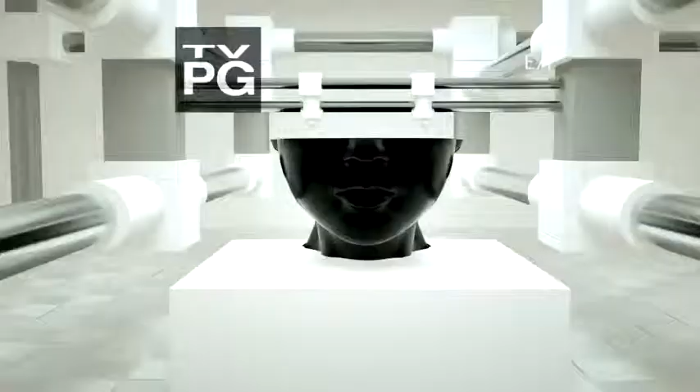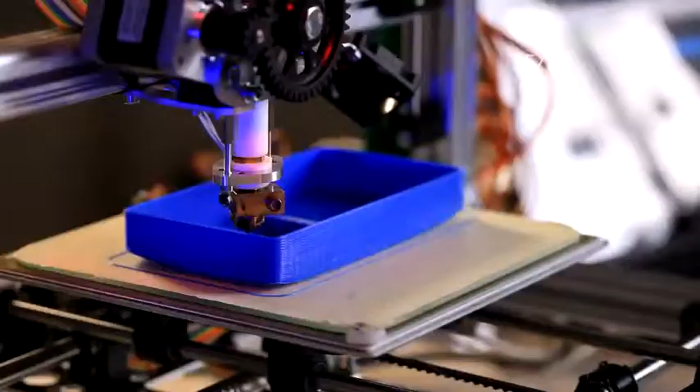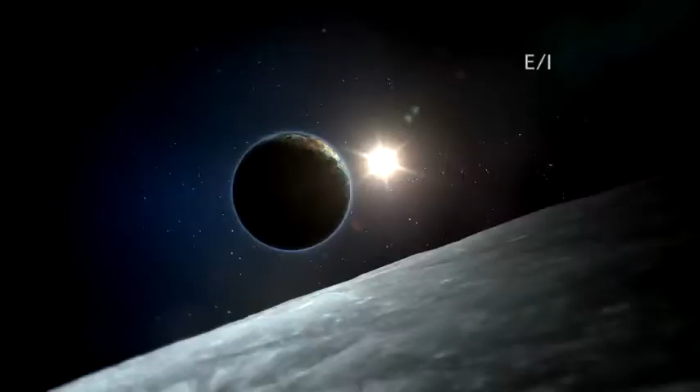Three-dimensional printing. How we make things will never be the same. It's really a tool that allows you to build anything that you want. Manufacturing worldwide is getting a makeover. People are already working on printing human organs. 3D printing is changing everything from healthcare to education. When the 3D printer arrived, I was truly like a child on Christmas Day. It's in the home, it's in kitchens, it's even in space. 3D printing, how it will change your life, in this week's edition of Earth 2050.

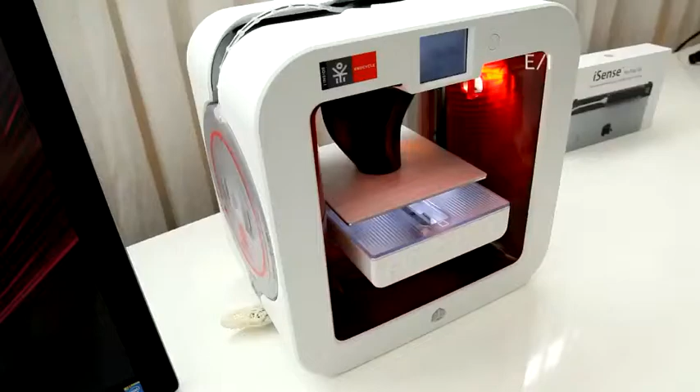Even though this technology has been around for a long time, it's really only starting to take hold today. Manufacturing doesn't just happen in a factory, it now happens in your home or in your school.

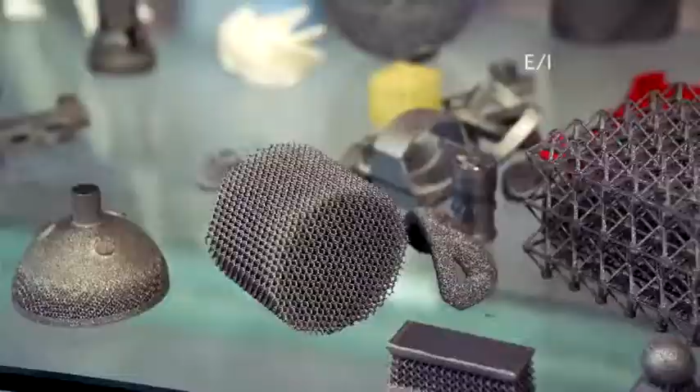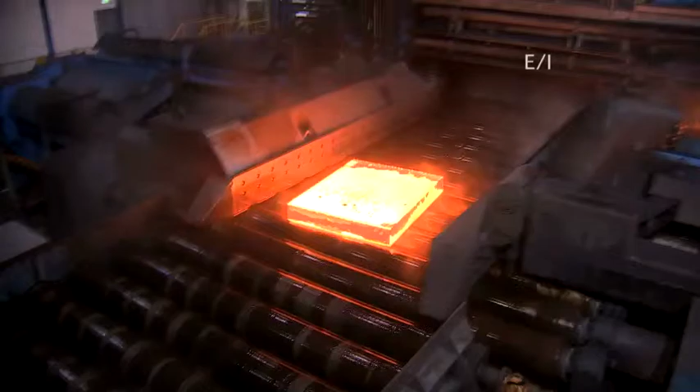So what exactly is 3D printing? It's literally creating something from nothing, which is not the way products have traditionally been made. That old way is called subtractive manufacturing. Subtractive manufacturing has been around for thousands and thousands of years, ever since the first person took a stick and a knife and carved it into a spear. That was subtractive manufacturing. 3D printing reverses this process.

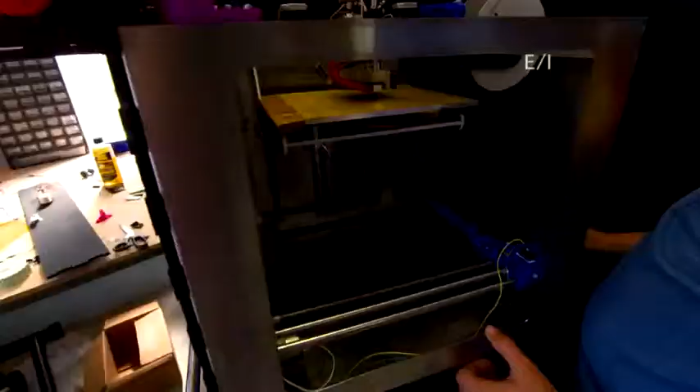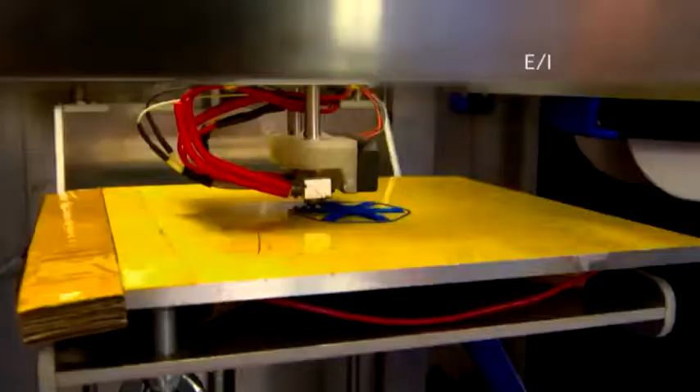You start with an idea, you create it digitally on a computer, then actually use a printer to build a solid three-dimensional object from that design. It's the opposite of subtractive manufacturing.

So what is 3D printing? It falls under this field of additive manufacturing, the concept of building something up layer by layer, adding the layers together essentially. With a 3D printer, we're laying down material one layer at a time until we build that three-dimensional object.

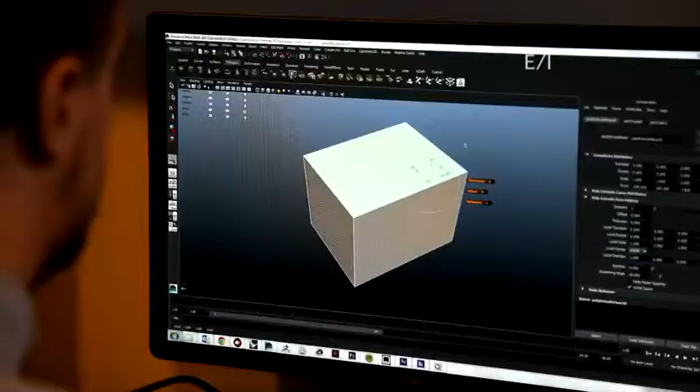So why is this concept so revolutionary? Because there are virtually no limits. If you can create an object on your computer, the 3D printer can build it. It's very easy to do. That is, we say complexity is free. The printer doesn't know the difference between whether it's a simple part or a complex part. It just comes out. Complexity doesn't cost you anything.

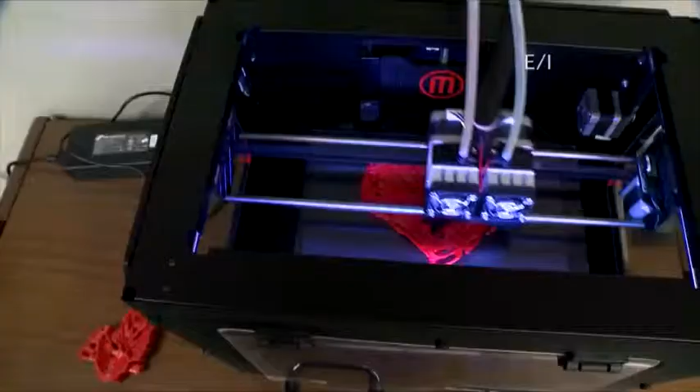The machine really doesn't know whether I'm building just a block with a hole in it or an extremely complex heart or even a DNA sequence. The machine doesn't care. And since you're starting with an idea on a computer and building it up from scratch, 3D printing is not only faster, it's cheaper. It's really what we call digital manufacturing, the idea that you can go from digital to physical.

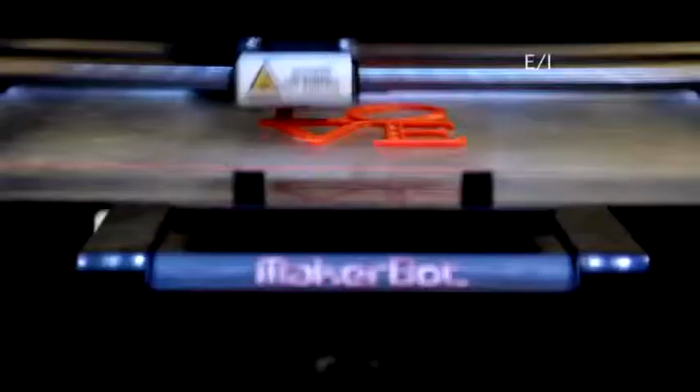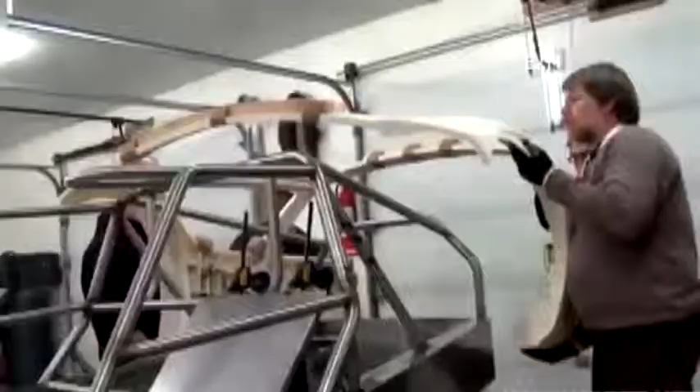3D printers can do everything from building small objects like toys to heavy manufacturing. So we're starting to see people learn how to print parts of spaceships, of airplanes. Designers of this aerodynamic, energy-saving car called the Urbee made most of it with a 3D printer. All sorts of materials, from metal to plastic to sugar, can be used to create products.

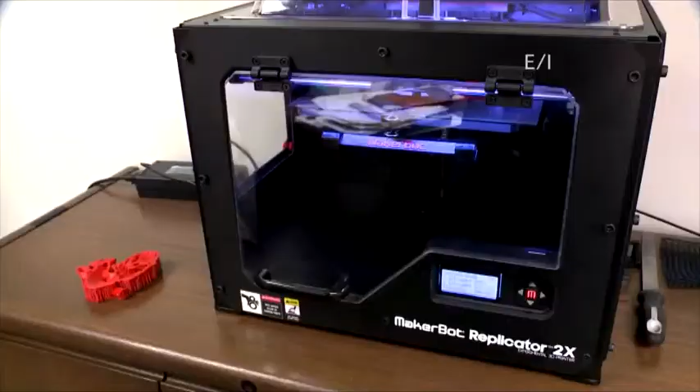3D printing is revolutionizing healthcare. People are already working on printing human organs. In fact, there's some very successful work that's already been done. This is a very important tool. It's made it possible for us to do a lot of things. 3D printers have actually saved lives.

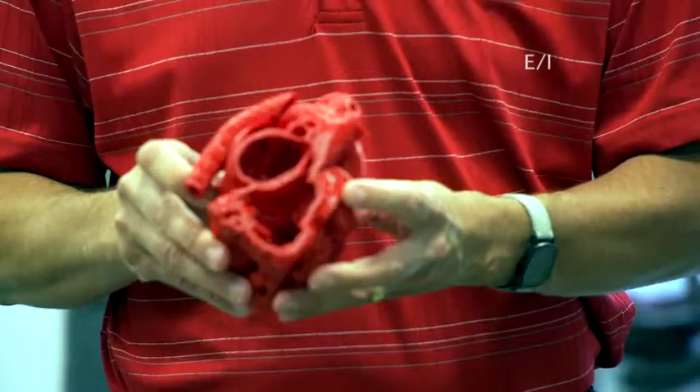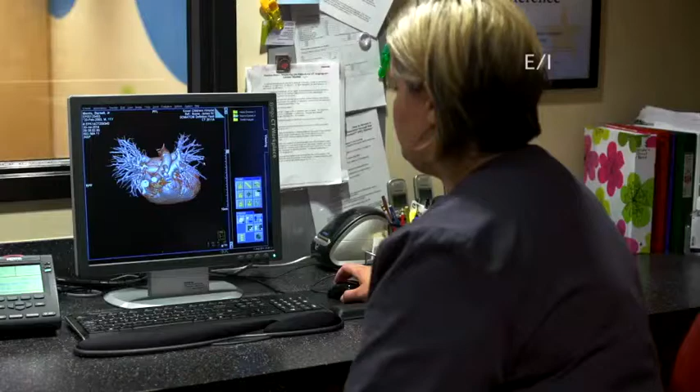Surgeons having to operate on newborns with congenital heart defects, which is an incredibly difficult operation, have turned to 3D printers. This is a scale model of an infant's heart that was built as a pre-surgery planning model. They were trying to figure out what's the best way to do this surgery without impacting the child in a harmful way. The child's X-rays and CT scans were enough to create a computer model of his heart, which was then built with a 3D printer.

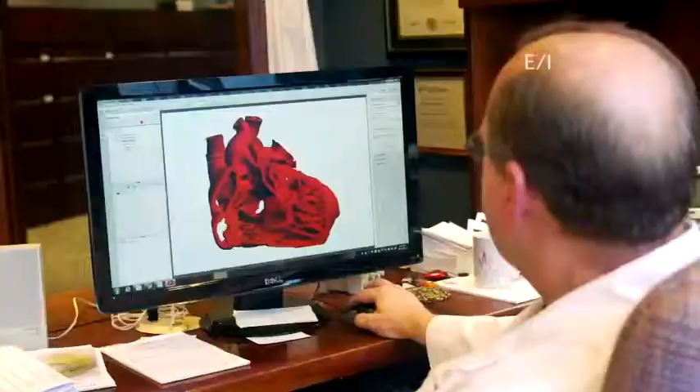They call me up and say, listen, I've got a model of this heart. You want to see it? Thanks to the 3D model, surgeons knew exactly what they were dealing with before they went into the operating room. It should benefit the patient because it benefits the surgeon. If you plan in advance, you can minimize the time it takes to work inside the heart and do the repair.

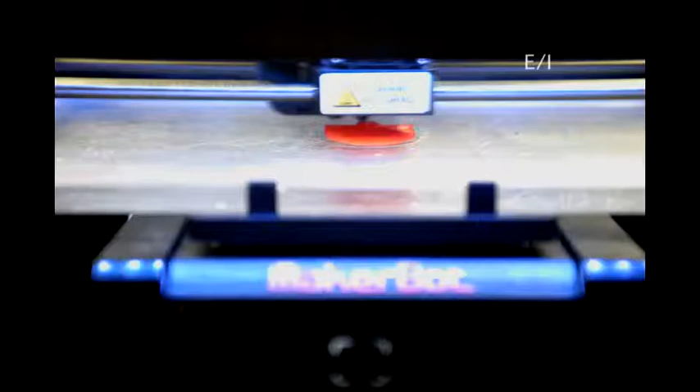What may be most revolutionary about 3D printing is not how it makes things, but that everything that it makes, like the child's heart, can be custom made for every person. And that could change our relationship to many of the products each of us use every day. We see 3D printing as an incredibly powerful technology, a very disruptive technology, a technology that really has the potential to influence and shape almost every part of the world as we know it today.

Coming up, we explore where 3D printing is now and where it's going on the road to 2050. It's amazing. It completely unleashes creativity. You can create just anything that comes to mind.